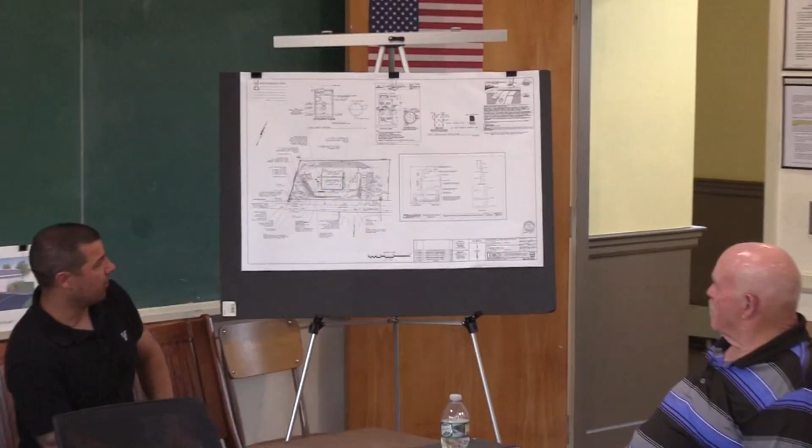And this goes back to last year. So basically the changes, other than the fact that the building was lowered 2 feet in elevation but stayed in the same location, the changes that are there are all driven by DOT.

The big change is that we had a trench drain down at the bottom of the entranceway to pick up the remaining portion of the water.

That discharged into their gutter line, which was approved by them in 2015, but since construction didn't start until recently, the permit expired and they made us go through this new process.

They want you ultimately to keep all the water on your site. They don't want any water, even if you're treating it, holding it back, making the runoff the same as existing. They don't want the water from your site.

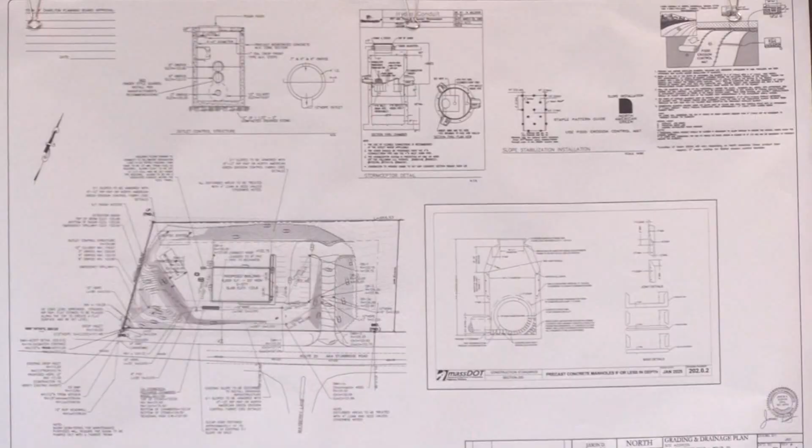So they had us do test pits across the whole site. We had to do reports on why we had to design it the way we have it. There are some tough grades on this site.

There's a 2-to-1 slope coming off the road up in there. The driveway is basically a funnel that goes in. But ultimately, they wanted us to remove this trench drain and have catch basins instead.

It's not even in their layout. We argued with them that if we do this, we're not going to capture a lot of this water coming down the driveway. Not only were we not getting responses, but during Zoom meetings, they didn't care.

So we did that—we got rid of the trench drain. We brought 2 catch basins up top and added about 400 feet of pipe to bring it all the way down to this corner to discharge to the drop inlet they have, even though before it discharged down their gutter into the drop inlet as well.

So we did that, and then Mike requested us to give him a new plan, and he had 3 comments on the request to have this be a field change. 2 of the comments were regarding the slope that was disturbed putting in this pipe.

I added a note about treating the 2-to-1 slope with some sort of erosion blanket when it's seeded, as well as the back slope. Since the building was lowered 2 feet, the back slope went from a 2.5-to-1 to a 2-to-1 slope.

And the final comment regarding the drainage was that he wants to see a revised stormwater analysis to show that we're still meeting all the stormwater standards. I did talk to him about that.

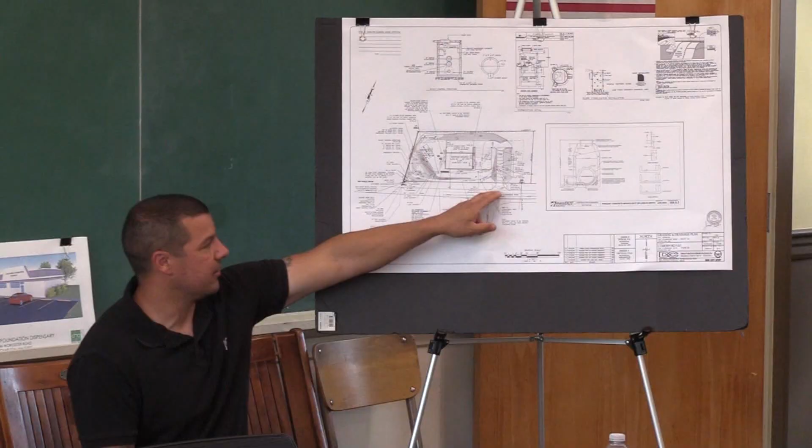I explained to him again where this all derived from. I said, Mike, when I rerun this number, since we're getting rid of this trench drain, now this water is basically just coming out into the street, not captured. We're most likely going to have an increase in that area. I asked, what do you do there?

And he said, we'll cross that bridge when we get there. He said if DOT's the one that drove that to be the case, they will ultimately just have to accept the fact that there's more water going out there.

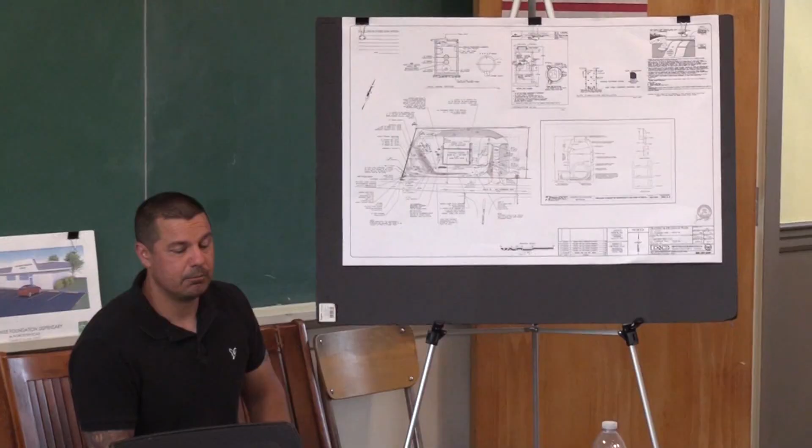Is that up the driveway? That's the driveway, yeah. But they won't let us put a trench drain there, or leave the drainage the exact way it was. It's a substantial cost, and we did not want to spend six figures on extra drainage completely just because.

But you know what happens once it starts creasing up and freezing over, the water finds its own way to get to wherever it wants to go. No, yeah, it's not like you turn it on and it's an instant slope. There is a good landing area. It's hard to have that landing area, but it's a pretty substantial one. The driveway now is quite reduced in slope.

But so that's where we're at. Those are the only real changes. We did rotate the septic system in the back to get it out of the parking area, but we went through the Board of Health with that. Other than that, there haven't really been changes to the design. It's all just derived around the DOT drainage.

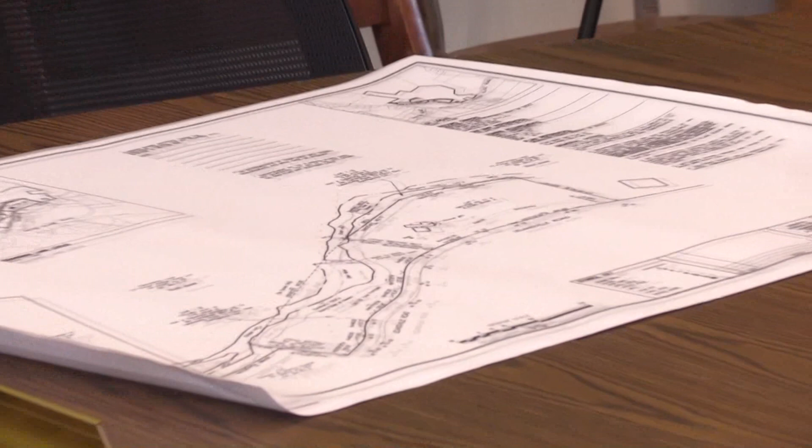Now, A&R, what do we got, Randy? This first one's on Lelandville Road, it's a Hilker property. They're taking a portion of their existing property, this long thin parcel along Lelandville Road, and adding parts of the larger property to it to give adequate area. The rest of the property will remain one large lot, approximately 70 acres. So they're adding land to this property, taking it from a lot with environmental restrictions, to give that property a little more land.

Is there a name for that stream? That's the one that goes between Hayden Pond and Bucking Hill. So right now they basically put these two lots together.

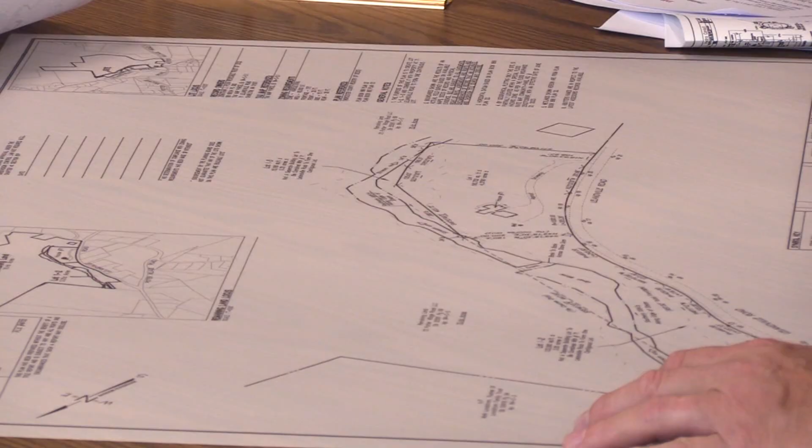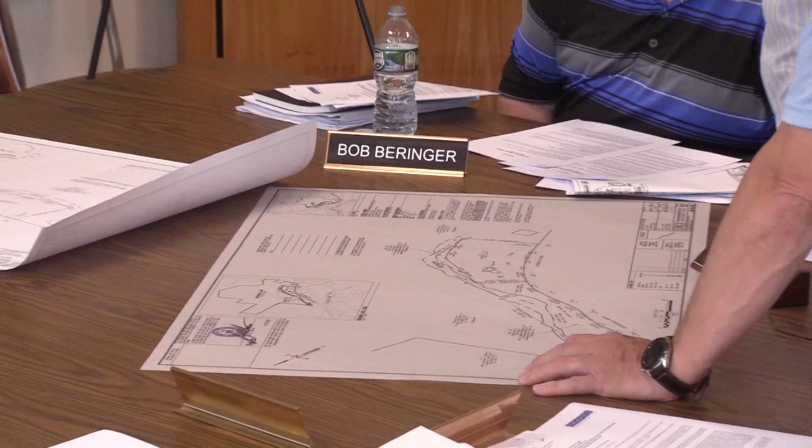Are they doing something with that land, or is there already a house on it? No, they want to add it to the land where the existing house is. I don't know the reason behind it, because pretty much can't use it, but it just seems like, so what are they adding?

Is this 1-2, and 1-3 is this sliver? Or what is it? Just along the stream and 0.3 acres. So it's just this sliver, whatever that goes back to the stream is. So 1-2 and 1-3 into the whole thing. Gotcha, okay, that meaning balance, so this is their remaining part.

Up here, and that property still has some land on Lelandville and also part of Village Road, so the larger parcel still has adequate frontage. But lot 1 is not part of this, right?

This house lot? Well, that's what they're adding to, so they're adding 1, 3, and 2 together? I think it's just 1 and 2, this remaining land. Well, they're pulling lot 1, 1-2... 1-2 is all of this, and they're adding lot 1-3, or they're adding lot 1-2 to lot 1, they're adding lot 1-2 and 1-3 to make it a big lot. So before it was just this. They're adding this and this to this whole lot to make it a big long lot.

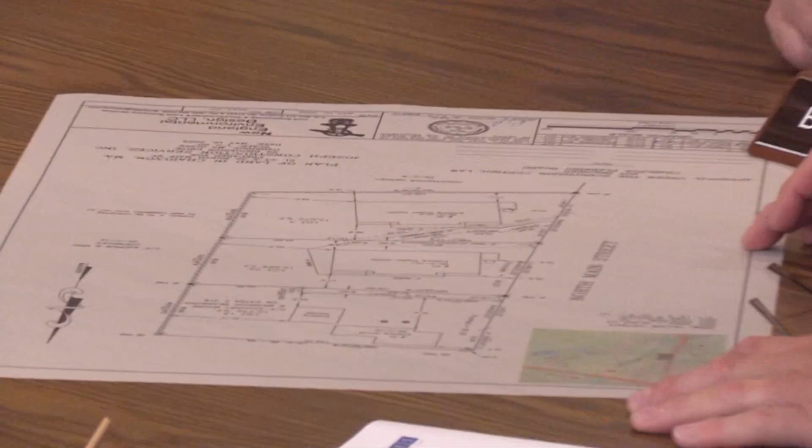Is there anything involved with this house being too close to the property line if they change it? We don't have any setbacks to driveway. Okay, so where's—oh, 7 North Main Street, so it's just that line there. It's not even the whole property, just that driveway or something—just the easement? No, it's...

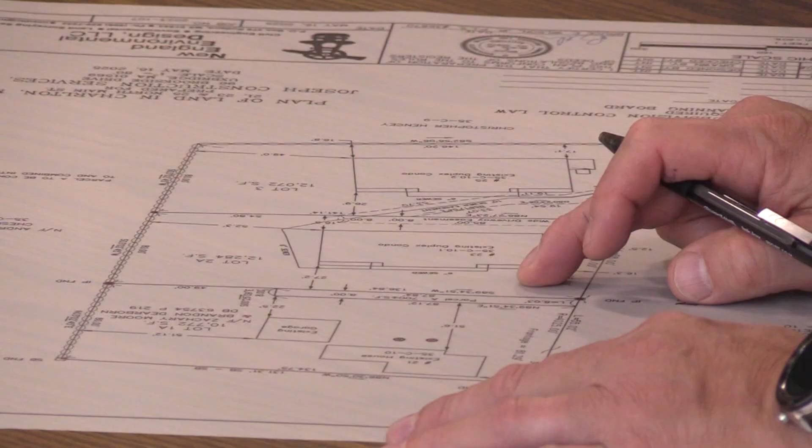Parcel A, you want to put it right side up? So this is being added to here, and then this is being taken away—that's added just to here, and that's just an easement there, for sewer. But they don't actually show the driveways out here. So it looks like they're just adding a little piece to one lot, the other lot's not changing? Is that correct? So this lot is changing, they're adding parcel A to 2A, that's really it—taking it away from this existing one. Is that right? Yep, okay.

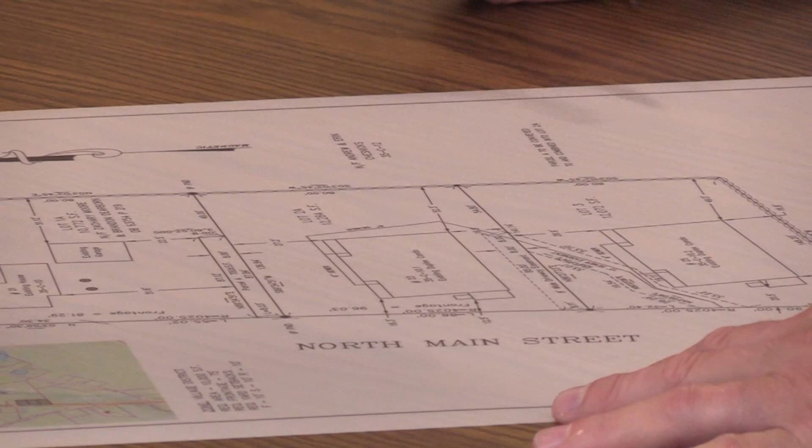I think the driveway's already in. It doesn't really say—it's already in, do they have to show the change now? I don't know, I drive by it every day. Parcel A is to be conveyed to, combined to lot 2A, okay.

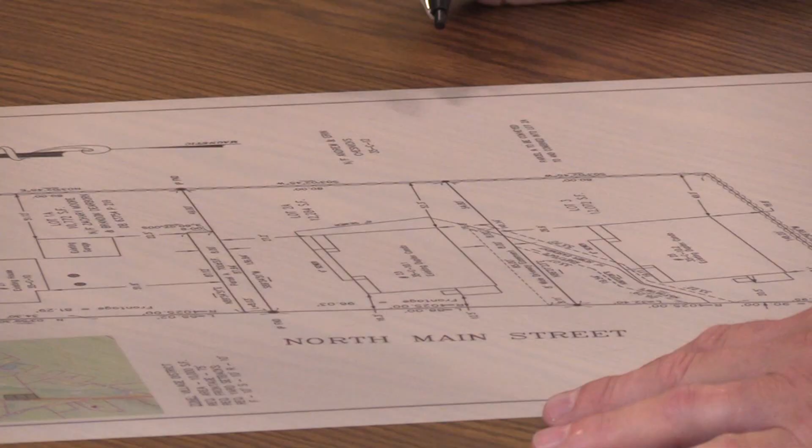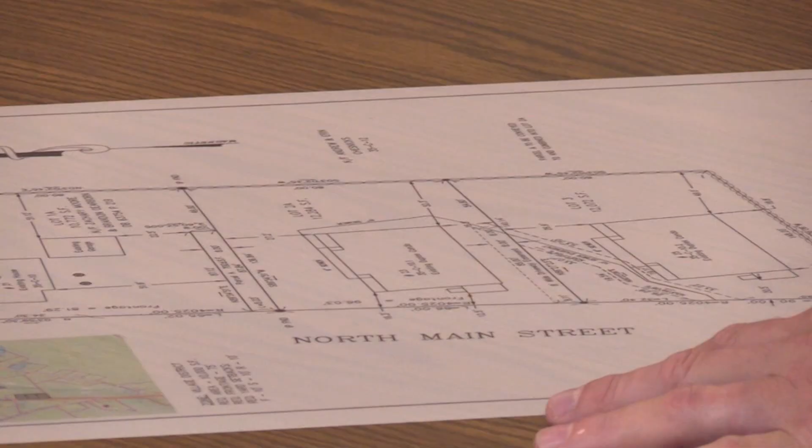Setbacks on it, 3 feet. Got some waivers on that. Well, actually, did we vote on this? Make a motion to accept the ANR for the plan of land, 21-23-25 North Main Street. Second that motion. All those in favor? Aye. Aye. Right down.

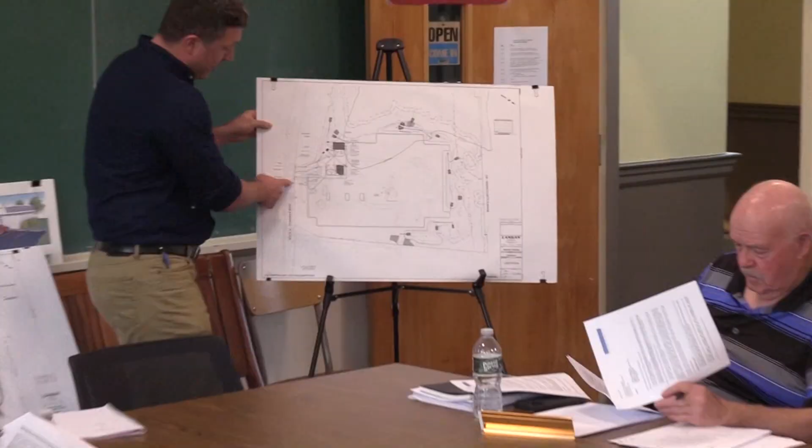It's kind of difficult to see here, but this is our utility plan. So the driveway is here, and the hydrant is within the state highway layout, right off of the gutter line. The water is on that side of the road, right in the gutter line, so we won't have to trench too far.

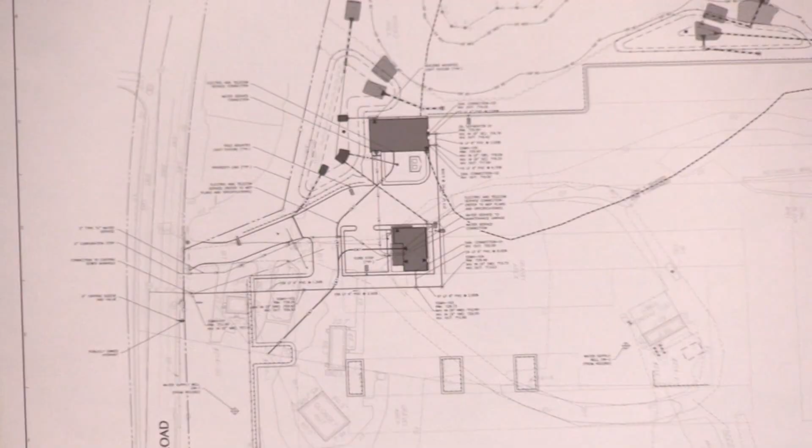We are going to have to get an access permit through DOT to tap into the line. DOT's easy to work with. We'll get some contacts from our other guys. Almost as easy as Eversource. So we're hoping that process goes smoothly again.

So that was the adjustment to the plans, and really the main thing. The remainder from a technical perspective, the remainder of the comments from Graves' letter on Friday were very minor and some construction detail related items, for example, details on gate hinges and heights of different gates, things like that. So the majority of the comments were resolved.

The main items for discussion for this group are really the first 3 comments in their letter in regard to consistency with the use in the zoning district and the industrial general district. Our response to that, as you've seen, is we've been operating here since 2018. It's an industrial use. We believe it to be consistent with the zoning district. No big changes to the existing use.

That's really the main story of the project. It's a consistency of use. The intensity remains the same. It's really improvements to all the environmental conditions, stormwater controls, and the buildings. Same number of employees, same gate turns, same everything. It's very minor stuff, like showing the fence detail from fencing in the dumpster enclosure, for instance. It's all little stuff.

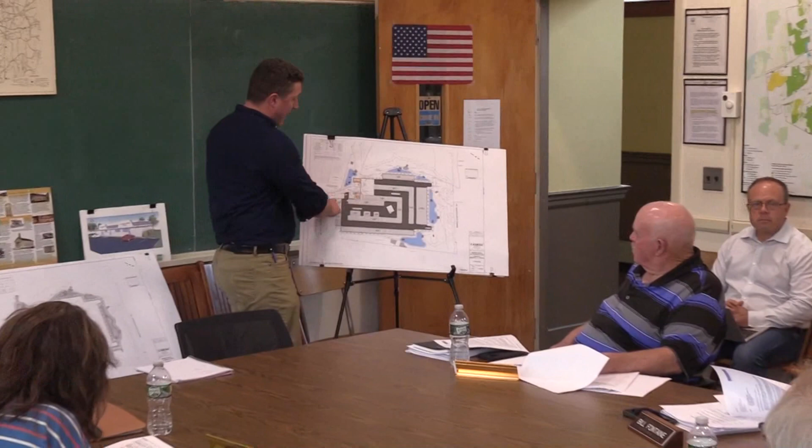So in terms of the parking intensities we were just talking about, that was related to passenger vehicle parking in the asphalt area. The rest of the area is going to be compacted gravel surface for trucks.

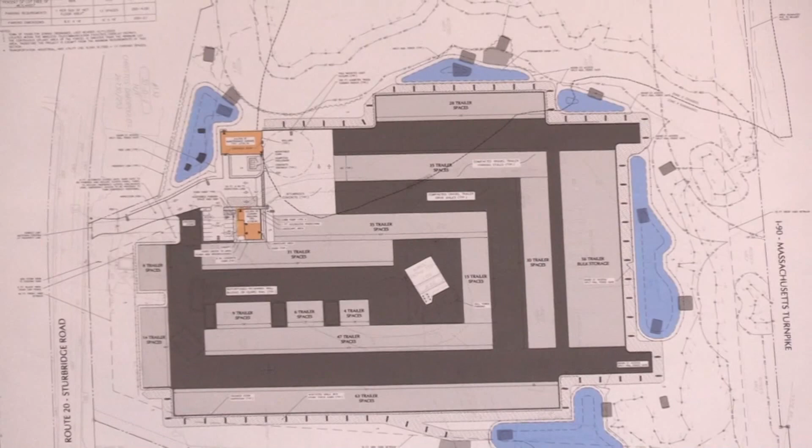Really it's not an open lot. It's for commercial uses for Premier to operate those, and as a necessity of operating the lot, they will keep those drive aisles clear to access the trucks and trailers. It's not a public way, it's operational - more so sitting idle until it gets picked up and out.

That's really one of the main goals here - right now if you just look at the site, trailers are parked there because the topography's not level, and the whole goal is to level that out so they can operate with clear drive aisles for them to use.

There's also a maintenance issue with striping on a gravel surface. So we understand the comment, but we think it would be necessary for the use.

Are there curbs or Jersey barricades in that field of parking, just so the trucks don't back off the edge? Yes, something like that - good question.

The way the stormwater system's designed is for everything - there's the cell tower in the middle of the property - and everything sheet flows off and is captured in perimeter swales around the edges of the gravel surface, then it's conveyed to the various basins. So to answer your question, just off the back of the gravel yard.

Before you get to the drainage swale - it's tough to see at this scale, but on site currently there's a lot of old retaining wall blocks that we're proposing to bury there, basically like wheel stops or guardrail along the perimeter to do exactly what you mentioned.